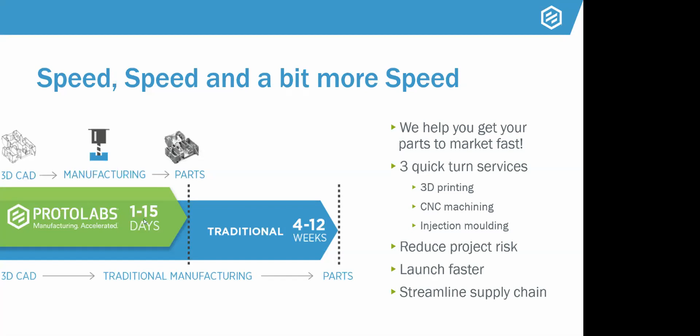Let's see this illustration, a minimalistic but precise comparison between rapid prototyping and traditional manufacturing. In rapid manufacturing, we can have prototypes within just a few days, with design iterations done very fast and in the most cost-effective way, mainly through 3D printing and CNC machining.

After all prototypes are confirmed and designs verified, we could move to injection molding to have a few thousand parts. This is fast due to very short lead times—injection molding starting from 1 day for a very simple part, up to 15 days for more complex parts.

There is a big variety of materials, and after all the parts are made, verification and validation would need just a couple of months to be confirmed. All in all, due to the short lead times, we can get products into market in a very short time—in this case, even half the time of traditional manufacturers.

This is because of many advantages. Protolabs has in-house software—everything is done in-house, which helps maintain a very fast process flow, making sure everything flows from the very beginning, from receiving the design until the end when we have the part.

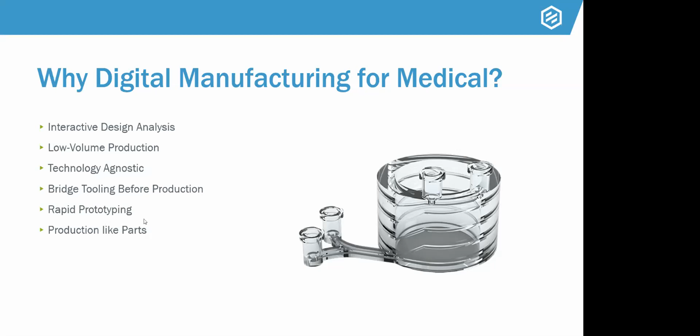So at this point, let's have a look at the case study. Let's look at a very interesting case study with Parker Hannifin, and see how they benefit from digital manufacturing, from Protolabs in this case, and what the actual product is they made.

It all started 7 years ago when then Parker Hannifin CEO Don Washkewicz challenged his team with a question: what's the future of our company? This question triggered a flurry of activity to chart out new territory and opportunities that would secure the company's growth well into the future. The initiative eventually led the company to investigate how it could adapt its core competencies in motion and control technologies to develop wearable robotic devices in the prosthetics and orthotic space.

As you can see here on the right hand side, the image of the actual product. As it explored the opportunity further, Parker Hannifin connected with researchers at Vanderbilt University working to adapt robotics technology to help patients with lower limb paralysis increase mobility and regain the ability to walk. This led to the development of a wearable exoskeleton that consists of a brace worn on the hips and legs, powered by motors, batteries, and a set of different other electronics.

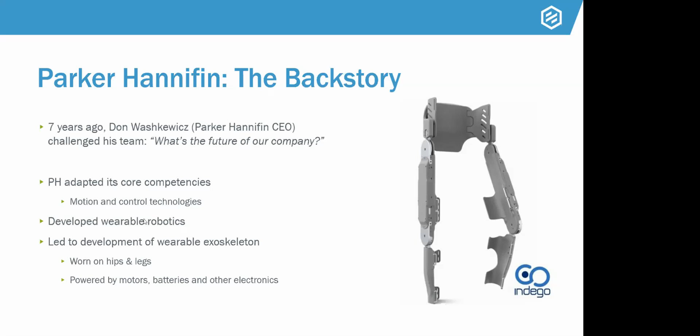So this happened in 2012, where Parker Hannifin and Vanderbilt reached an agreement to license the technology, and soon after, the company began working to commercialize a robotic exoskeleton called Indego. Dr. Ryan Harris was a co-inventor in the development of the technology as part of his doctoral work at the university, and Parker Hannifin brought him on as the technical lead for the business unit tasked with bringing the product Indego to market. So let's have a look at the actual challenges this team met.

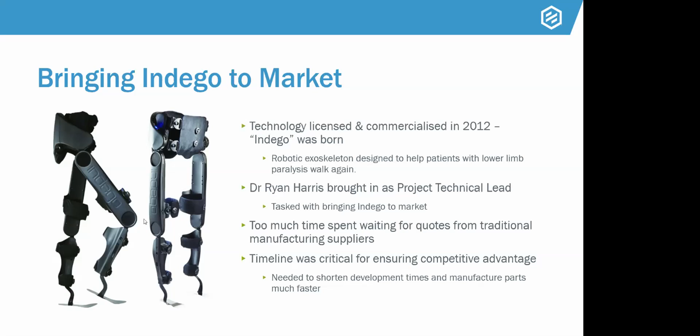So one particular design challenge that required quick turn parts was related to a component that serves as a light pipe for the device. This part transmits light from a small LED on an embedded circuit board out to the exterior so that the user can see the device's current status. This light indicator is particularly important because this is how the actual user, the paraplegic, the stroke patient, or whoever is using the system knows what state they are in, what mode they are in, and what's about to happen with the device.

The initial light pipe design was manufactured with a molded transparent thermoplastic. However, after a few testing cycles, it became apparent that the material was too brittle to hold up to the rigors of daily use, since the system was designed to flex with the user's movement. Dr. Harris also explained that the light pipe was part of a larger assembly, and the relative motion of the assembly did not really cooperate well with a rigid plastic light component.

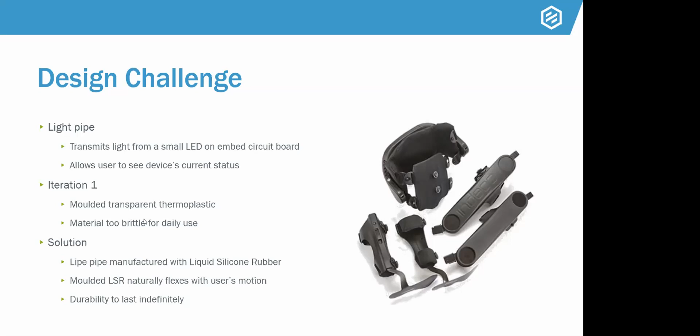So what happened? They needed a cost-efficient molding option that was optimized for this stage of product development, since design was not yet finalized. This robotic exoskeleton was still in the prototyping phase, and FDA approvals were still pending. So this would require a more costly investment in traditional tooling, which was not obviously very ideal.

So the team turned to Protolabs, especially for the LSR molding, the liquid silicone rubber molding, to quickly manufacture a few light pipe components so that they could test the new design and have the flexibility to iterate if necessary. So the key to accelerating the molding process was, as we already mentioned, the interactive quoting system.

Through Protolabs, which shares the DFM feedback, a full interactive quote that is quite precise and comprehensive. With this tool, they used to upload parts for quotes. The quotes were ready in just a few hours, and then they could go through several iterations until it was within their targeted cost. So this enabled a highly iterative design process while reducing development costs, since it could all be digitally achieved through software and didn't really require manufacturing final parts.

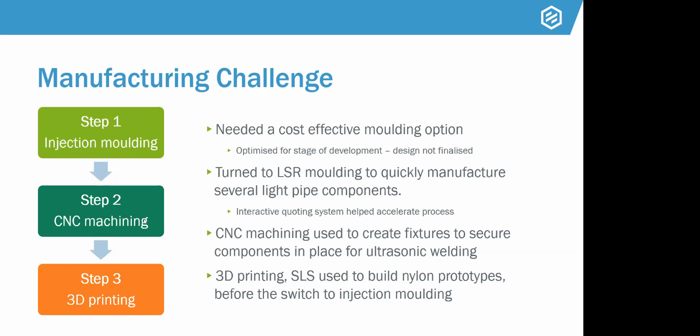So what was the result of that? With low volume manufacturing at its disposal, Parker Hannifin has been able to reduce development time, bring innovative products to market faster, and effectively respond to customer feedback. So overall, including molding production parts, Dr. Harris estimates that Parker Hannifin's human motion and control business unit has manufactured thousands of components with Protolabs, and of course will continue leveraging its digital manufacturing services in future generations of the product, in this case, the Indego.

So let's now have a look at which service should be used. It's a very good and very common question when it comes to making prototypes, moving to final production: how will we start, which is the most cost-effective manufacturing process to start with, and which is the next step in order to have more parts, more complex parts, and so on.

So this is really an economic discussion, which one creates the most value for you and creates the best business case for you. Again, depending on the requirements of the project, of the application, depending on the time frame that we have, the urgency and so on, for every single section we have different solutions with regard to processes. We'll see different options that can be offered for each process.

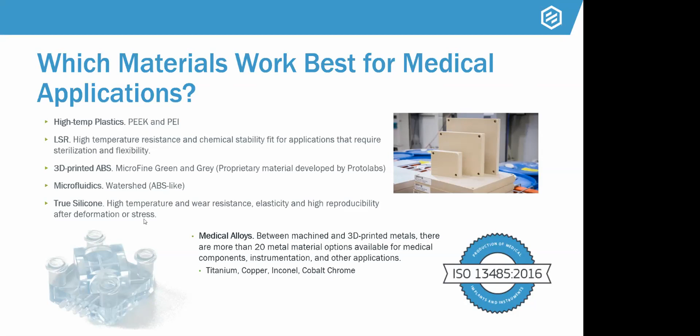So let's see the 3D printing for medical industry. Let's see a bit more about the materials. As we have already discussed, and I'm sure that you already know, 3D printing is an incredible approach for high complexity, low quantity parts.

The ever increasing range of materials makes it applicable for more and more applications. So it's being used for prototypes, but at the same time for end use parts. It's also being used for jigs, fixtures, and component housings.

As we have already mentioned about the microfine resin, we can have micro resolution, the actual layer thickness is about 0.025 millimeters. So it can produce very, very tiny parts with very good accuracy. Generally, this is a characteristic of the stereolithography process in general, and this is something that we can offer.

The type of materials could be ABS-like, PC-like, and polypropylene-like. The reason we say it's 'like' is because they are not purely ABS or PC or polypropylene. They just mimic the properties because the parts are made in a very low heat process, which is stereolithography. So the mechanical properties are quite limited.

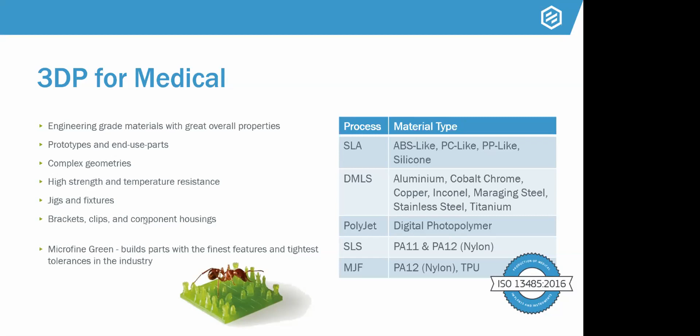So let's see the design goals which are likely to work for each company. The benefit of all this, with 3D printing and generative design, is that we can have lightweight parts, we can reduce material, hence cost, but by keeping the same structural performance on the parts. The combination of assemblies, the reduction in labor, and the increase in yields.

The more complex the parts, the better for 3D printing, because this makes the parts more cost effective, but at the same time eliminates secondary operations. Although there is a big list of secondary operations, we can still make the parts good the first time.

The part performance is improved, while we maintain the material properties. And of course, the supply chain could be optimized.

We can have parts on demand anytime, with absolutely no need to stock or store any parts which it's unknown when they're going to be used. And of course, more purposeful design for whatever your needs are. And it's a great opportunity to review, examine, and unlock new sources of revenue or customer base.

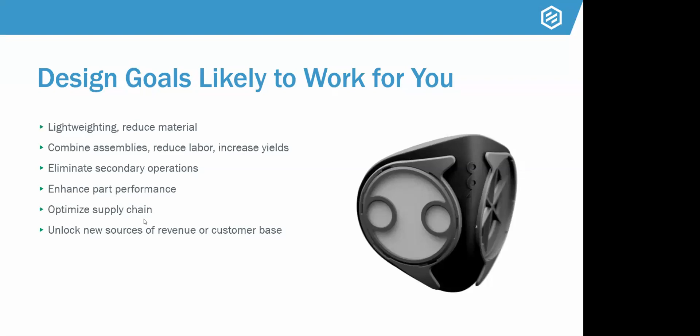So at this point, let's see another example, not really a case study, but a great example of how a part could start as a very conventional design approach, and how it can be drastically improved during generative design, along with the benefit of 3D printing in producing it.

So it's all about personalization. 3D printing allows personalization. As you can see on the images, we have a simple part and how it can become this. This, of course, has a great benefit on material reduction. It increases complexity, but at the same time maintains the performance of the part. And if anything, it gets better.

There are secondary operations which could benefit the medical industry, and these are the vapor smoothing that we offer. This process makes the parts smooth and more impact resistant and chemical resistant as well. They could also be used for some FDA approved applications.

So it's a great combination of the 3D printing process and a post process like vapor smoothing. All the efficiency and complexity of the design could be easily realized, but at the same time we could have a great surface finish, very close to injection molding parts, as well as great chemical resistant properties.

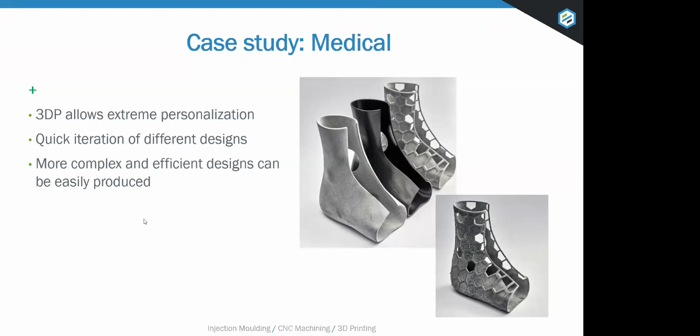So another real example would be this part we show here. It's a great example of highlighting how the part cost could be reduced through 3D printing, and of course with designing smarter. On the left hand side is the conventional design, and on the right hand side how this design was improved. The benefit, in numbers, is that part volume is reduced, build time is reduced, and the finishing and post-processing time is drastically, significantly reduced, and the total cost is way lower.

To use the full capacities of 3D printing, you must be familiar with design for additive manufacturing, or rely on experts like our application engineering team and CAD specialists. We have plenty of resources and design guidelines, which we'll speak about later on the website, with tips and tricks on making your design more efficient. It doesn't mean that if it gets complex it would be more difficult to produce, but it could be even better in the long run.

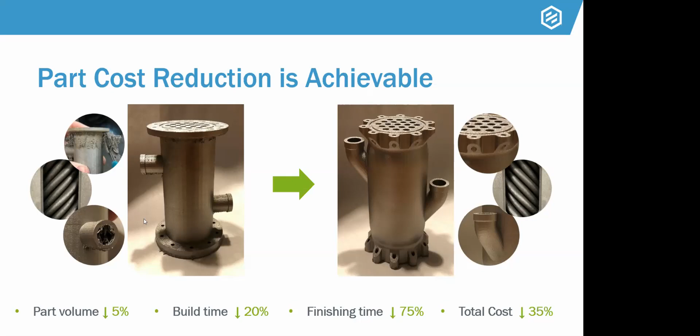To further improve overall cost reduction and improve part efficiency, we need to not only have a product design perspective, but we also need to embrace a system design one. Then two value streams become visible.

If we can decrease the number of parts on the assembly, the overall cost comes down very quickly. This is the benefit of 3D printing: we can consolidate parts. Instead of having, for example, 10 pieces for one part, we can have just one, which has the same functionality as the original.

Secondly, you can help the customer or companies with their total costs. We're using 45% as a rough gauge of purchase cost within total cost of ownership—think of that as depreciation and interest of that purchase. So in this case, the part itself is only 10 to 15% of the total overall cost that your customer cares about. It certainly has a good impact, but it's not the biggest area you can influence by utilizing the flexibility that 3DP gives you.

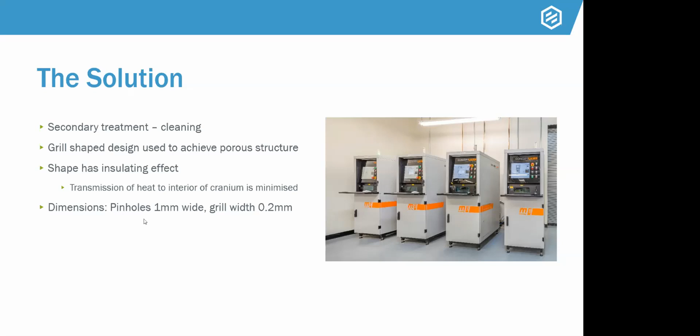After the basic structure was confirmed, the medical technology specialist took over at the second stage in order to fully make the part perfect and according to the medical needs. So the outcome was to create a perfect cut, a very tailored implant with a porosity of 95%.

The desired result was that liquids could pass through and the bone tissue could fuse and grow with the implant. So everything was very successful, and for the future it worked really well.

The key highlight here is the lead time. The data preparation and the manufacturing took only 2.5 days, not even 3 days. And the logistics and coordination took 1 week, and the transport 1 week.

So in this very crucial surgery, very crucial situation, 3D printing worked in the best possible way. And of course, a company like Protolabs helped bring this to life with the least possible challenges.

So this is again a great perspective, meaning that technology itself cannot only do miracles, but by collaborating and sharing expertise as a company with the engineers, depending on the project, we can bring products into life and save lives as well.

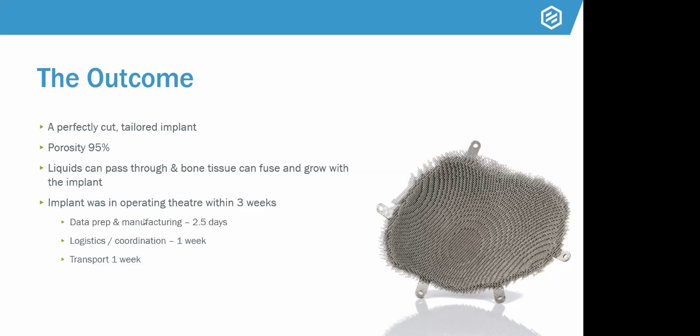So a very important, very nice product. Now, after this introduction, these main case studies and some more information about what can be done and how digital manufacturing could assist the medical industry in many ways, I believe we can all answer why digital manufacturing is a good fit for medical, how digital manufacturing can streamline the supply chain, and which service to use.